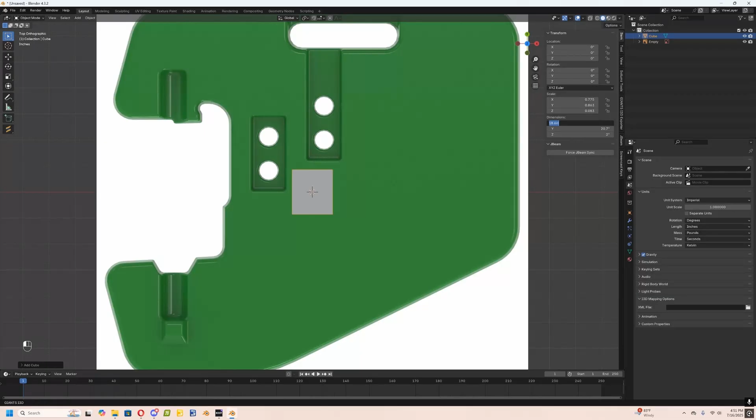So now we have our weight, and it looks like I have these reversed, so I'm just gonna flip these. And then we're just going to go into wireframe, and the reason I chose a reference image before, I should probably mention this, is because whether you're in wireframe mode or not, it'll allow you to see the corners of your mesh while also still displaying this image.

Because if I were to just go Shift A, image, and then mesh plane, and then just choose that image, yeah, it'd show up in material preview here, it'd all be there, but when you go to wireframe, it's just a regular plane with that texture applied. So that's why I like to

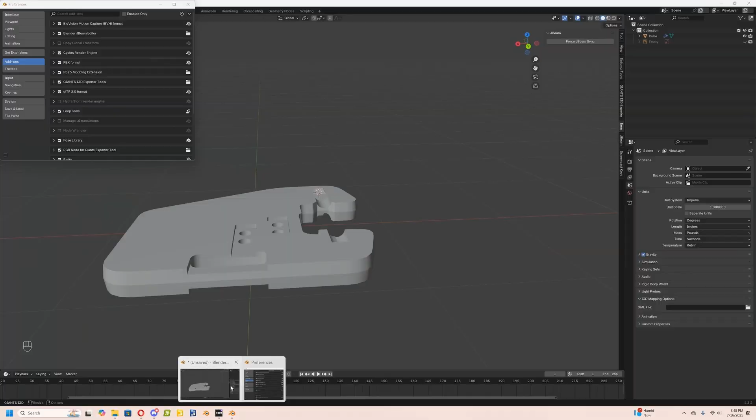Okay, now that we're done with the modeling phase, at least for the most part, I can go ahead and double check the sizes that Deere has provided on the website. So again, the height should be 2 inches, which, well, we got that. Width should be 18.4, and then the length should be 20.7.

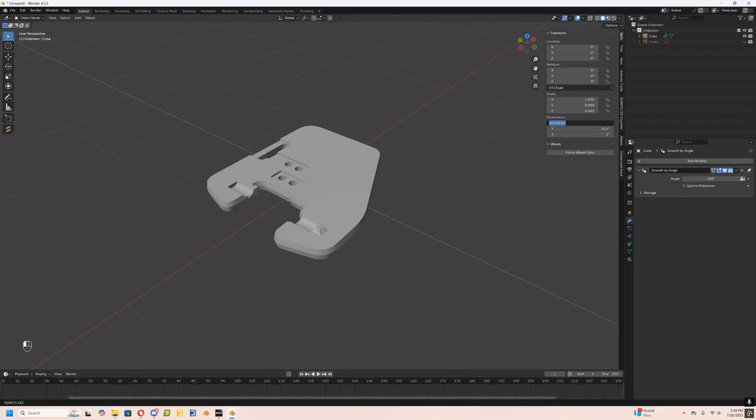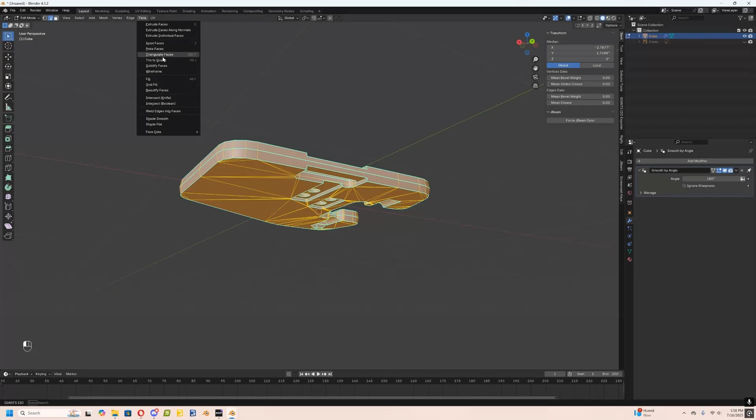Okay, now that we've got our size finalized and we've got all of our edges set to what we want it to be, we can just go tris to quads, just double check that. And so far we're doing okay on poly, maybe a bit high for my liking and definitely for Giants' liking, but you know what, whatever.

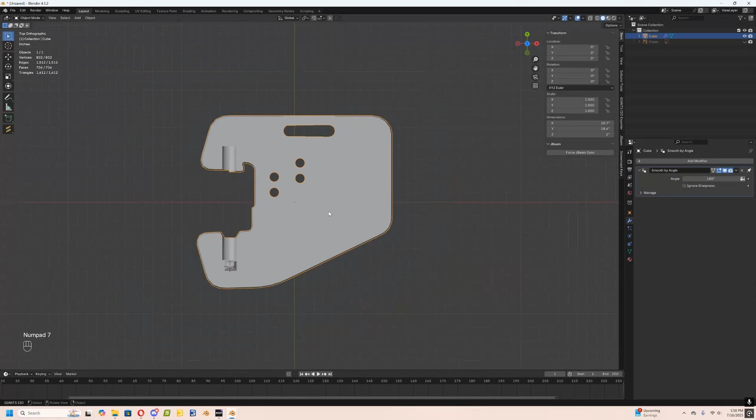Next thing we're gonna do is bake a normal map. If you have all your detail on the model like I do, and you don't have any emblems or anything that isn't 3D on there, what you do is you just duplicate the mesh, go high poly, low poly. But what I'm going to do is make a bevel normal map. So I'll just call this JD weight.

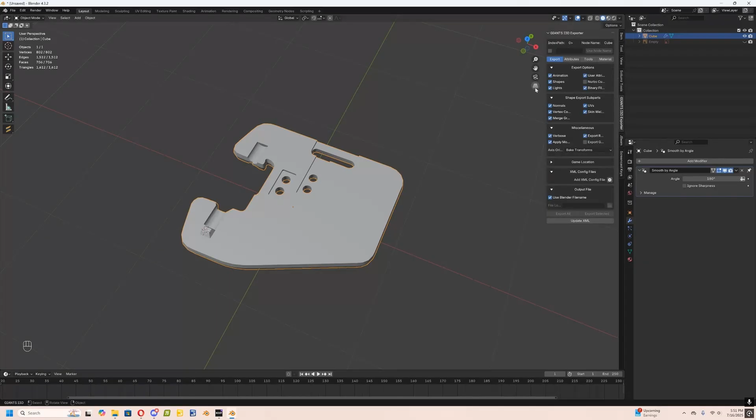Okay, now that we got that, now we can create our normal map. So I just want to go image, new, we're going to call this weight_normal. I'm going to set this to 2048. No alpha, new image. Set this to non-color, and we're going to go Shift A, and we're going to go bevel. So now we're just going to connect that to normal, and we're going to set the radius to 0.005.

With this selected, we can go set this to Cycles. I usually set mine to GPU because I get a faster GPU than my CPU. I think most people do.

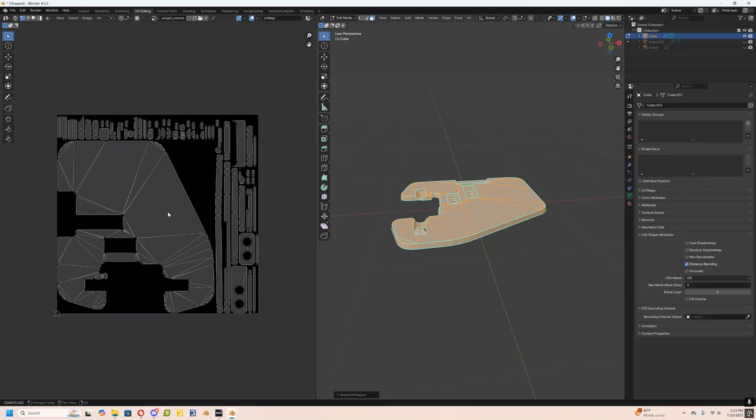Now we can unhide this, join that back. Actually, hold on, before we do, we're just going to link UVs.

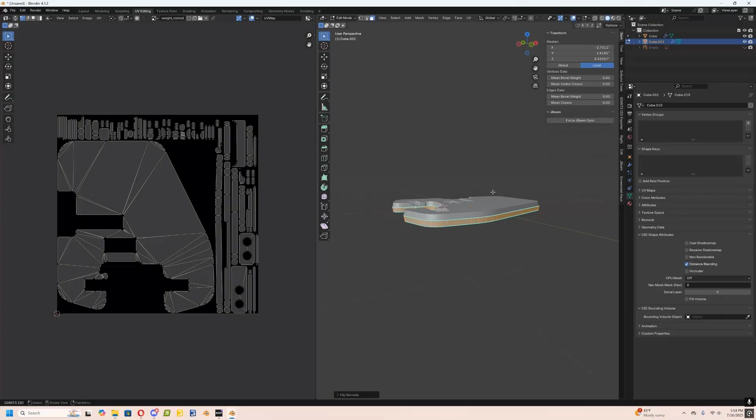That didn't quite work, so we're just going to go Shift D, Object Mirror, Z Global. We go Alt N, flip, because when you apply the rotation and scale on it, it'll flip it inside out for whatever reason. Not sure why, but it does, so I always try and do that.

Now that we've got our UV map made, both sides are going to be the same texture. Get a shading, and then now we can just go ahead and hit bake. Just hold on, now we hit bake.

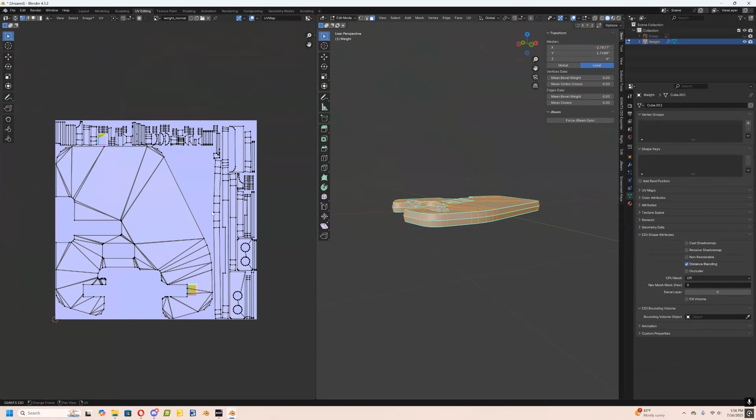Because I'm an idiot and forgot to do it beforehand. And then we're going to go ahead and take a look at what's over here. Nothing, okay, oh that was the other one. Okay, never mind, alright, now we can go ahead and bake again.

And that should have fixed that. So now you've got a nice clean normal map.

So we're going to disconnect this. We're going to go normal map. Going to connect this. And now we get a nice beveled normal map that looks, well, pretty good, honestly. No imperfections, it's all there.

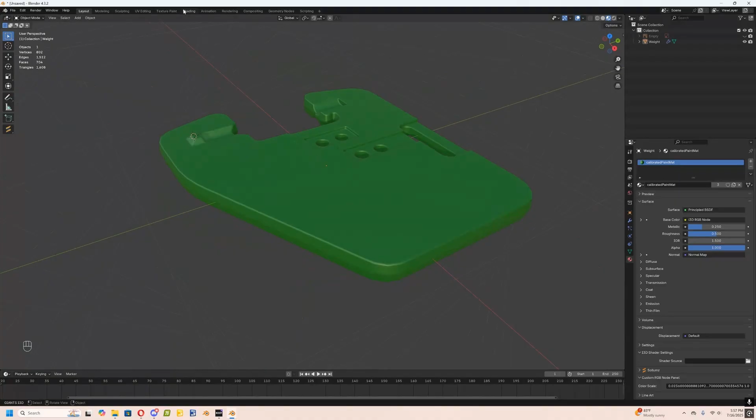So we're going to save this quick.

Next, what we're going to do is we're going to export. This is an FBX. Limit to selected objects if you just want one or the only objects in the scene exported. And then we're going to save this normal map as weight_normal.

And then in Adobe Substance Painter, we can go ahead and fire that up. Once we're in, go File, New. I would recommend getting the Vertex Design FS25 Substance files. They honestly did an amazing job, and I use them for everything. It turns out amazing when you use them.

So next we're going to import baked maps. We're going to find our folder here, weight_normal, get that selected, and then we're going to import our FBX. Hit OK.

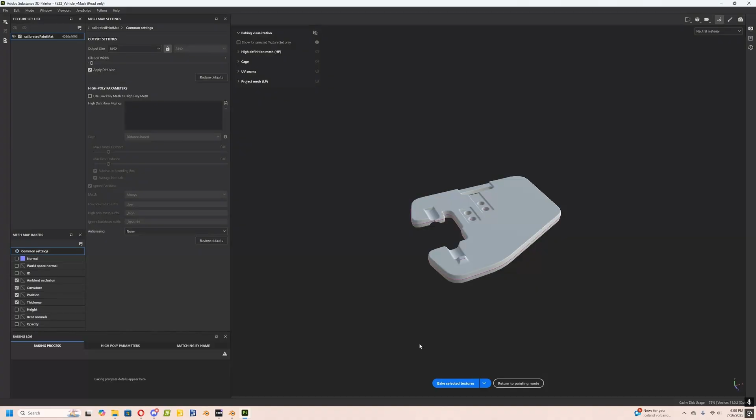Common settings, I like to bake in 8192, because then you can bake in a higher scale, but then when you export the textures, you can export it as 2048, less loss rather than if you bake in 2048 and there's a lot more pixels. So we're just going to go bake.

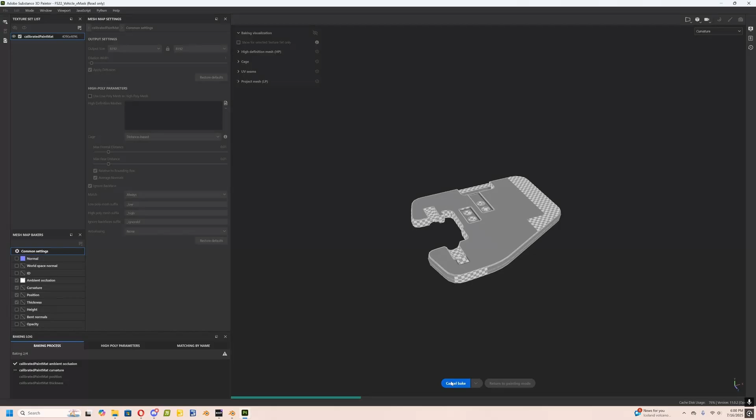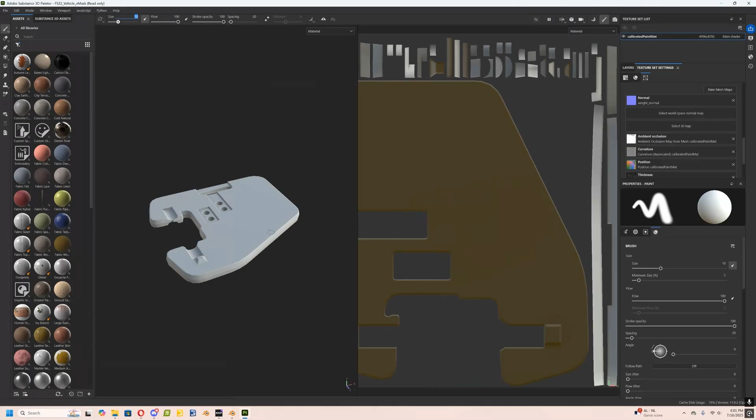Okay, now when we return to painting mode, we're going to have some shadows, maybe some different levels of detail in some models, where the ambient occlusion lights hit. We're going to go Smart Materials, find our Vertex Design Vehicle BaseMat, and apply that.

Underneath Layers, we can go down to our dirt layer. We're going to start with that. Click Dirt, restore defaults. Now all of our dirt's going to start showing up in the darker areas, some of the corners and crevices.

Now if we load this into Giants Editor right now, it's not going to look great. In fact, it's going to look terrible, because that's a lot of dirt, and what shows up in here is a lot different than what shows up in GE.

So what I like to do is set this to 0.35, and set the grunge amount to 0.75, and then we can change the scale of the grunge and make the dirt look a lot more frequent here. I'm going to bump this up to 0.4, and make it look like that. That looks a lot better.

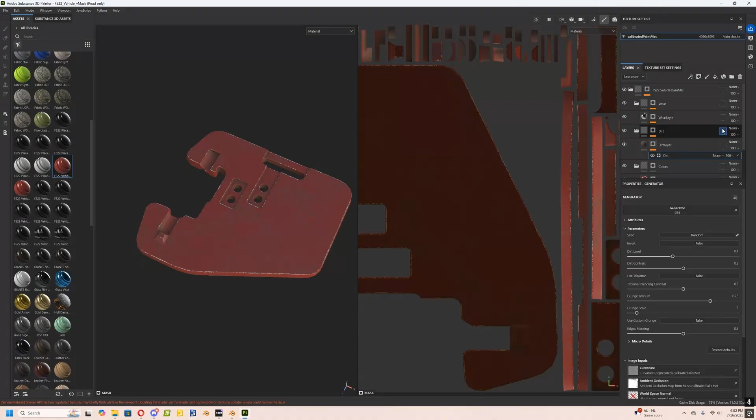And then for our wear layer, just pretty much do the same thing. With that normal map, it's going to generate wear all along the beveled edges that we had here. So I'm just going to turn the wear level down quite a bit, actually to 0.25.

And then we're going to go to grunge amount and increase this a lot. You can increase or decrease the scale however you please. I'm going to decrease it, so it looks something like that.

And that's going to look a lot different in GE as well, so just FYI. Now that we've got that all selected and we got all our materials applied, we're going to...

go File, Export Textures. We're going to change this to our export preset, so our FS22 vehicle VMask. And for size, we're going to go 2048, because remember we baked in 8192, but we want to export as 2048. We're going to change our file here so we export to where we want it.

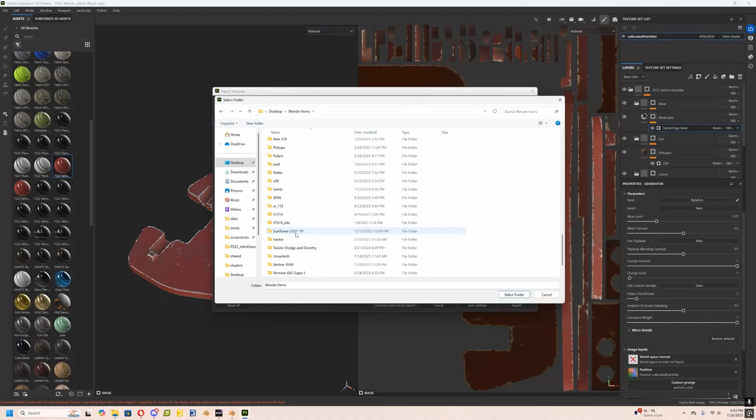Just going to go export.

We have this normal map, and when we have this normal map, it's the same thing. You can delete that one. We want our Blender render, and then we're just going to go open with paint.net.

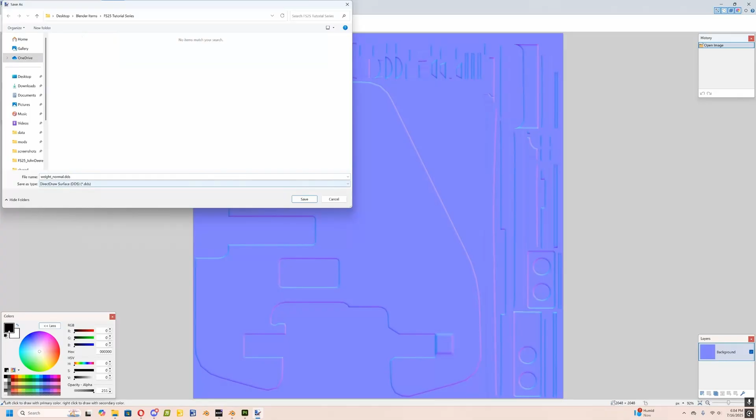We're going to go File, Save As, and we're going to go DDS. In here, we're going to make sure it's set to DXT1. DXT1 is used for normal maps, spec maps, anything that doesn't use alpha. Anything that has an alpha, so like a diffuse texture or decals, that'll be DXT5. And then DXT3 is used for things like brand images. So we're going to go ahead and save that.

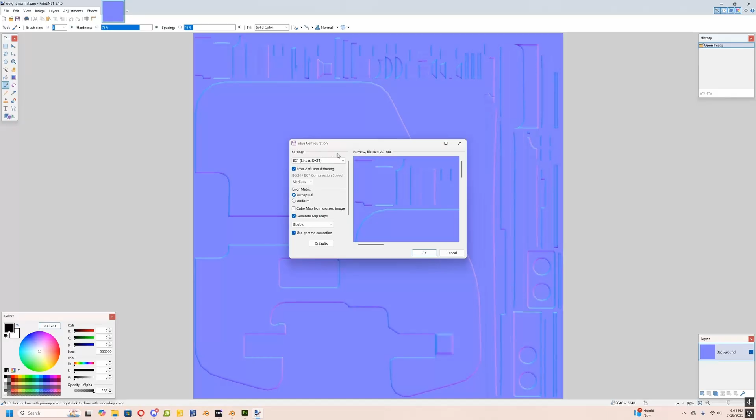We're going to do the same here with the VMask. We're going to go Save As, and we're going to name this weight_VMask.

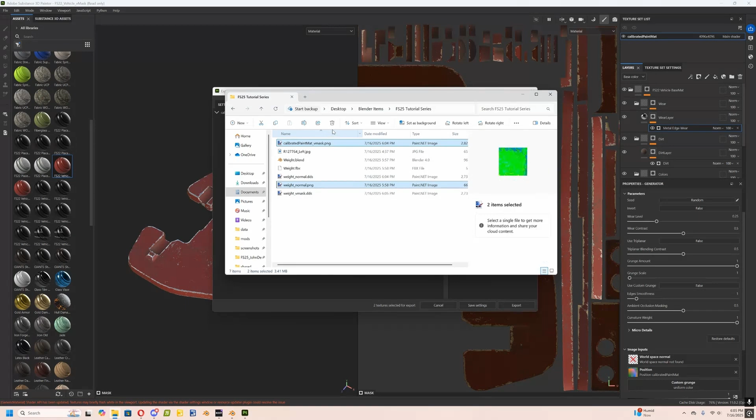Okay, we're going to delete the old PNGs. And then back in Blender, we're going to go to our Giants Editor exporter here. We're going to go Export, change the file path to here, rename this to an i3D, set i3D file, and export selected.

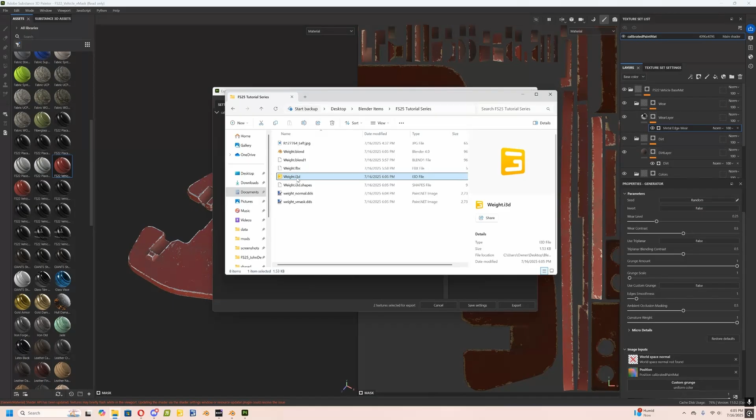Now, in our i3D, before we open it, we're going to right click Visual Studio Code. Something that always applies if you export normally is an emission. It sets the emission to white by default. If you set it to black, it won't apply a default emissive texture when exporting into Giants Editor. But if you do and you just forgot it, I'd just like to go delete that.

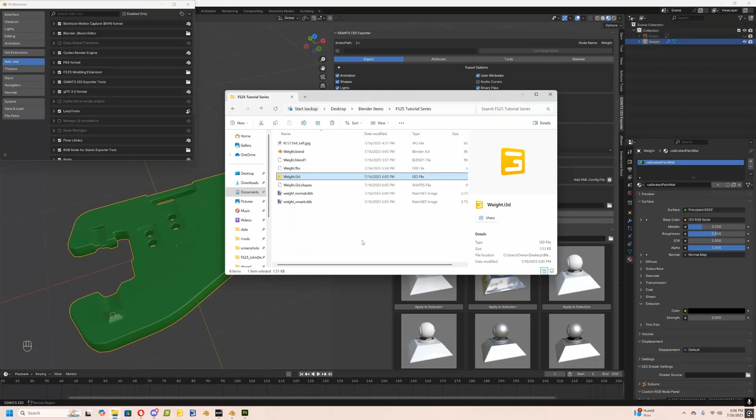Now, if we load it up in GE, it won't be bright white, and it'll have your material that you exported it with.

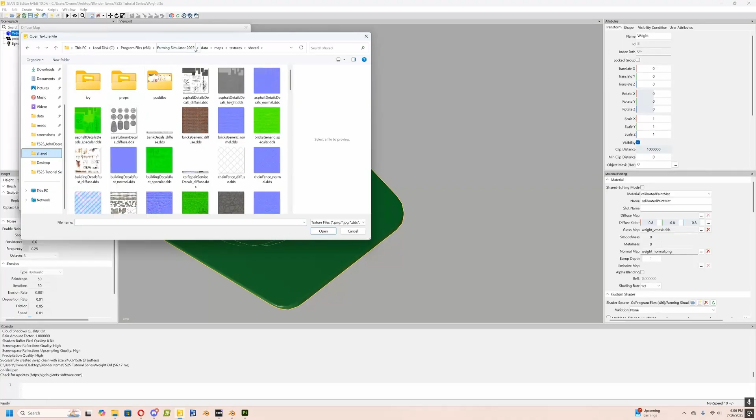Now under here, we can go ahead and apply our weight_normal DDS and our gloss map, and we just use a default white texture provided by Giants. Data shared default white right here, or white diffuse.

And just like that, you have officially fully modeled and given textures to your model. Just double check what the dirt looks like and everything will look like in a game.

We can go to Vehicle Visuals Control, and we can just slowly walk through the dirt and slowly amp up the scratches.

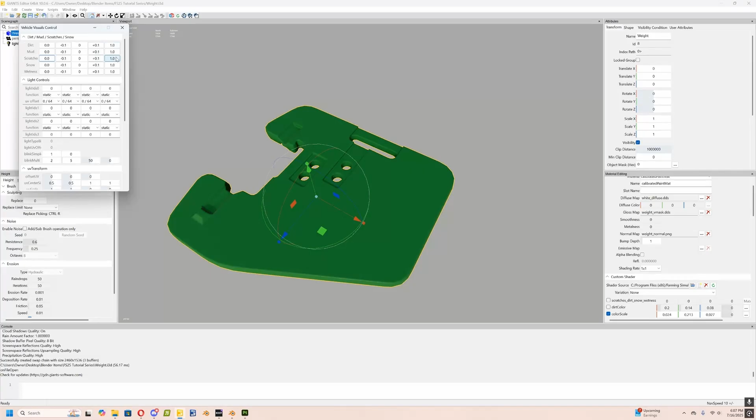So when done, it'll look something like this. Doesn't that look great? Maybe, I don't know, you be the judge. I think it does personally.

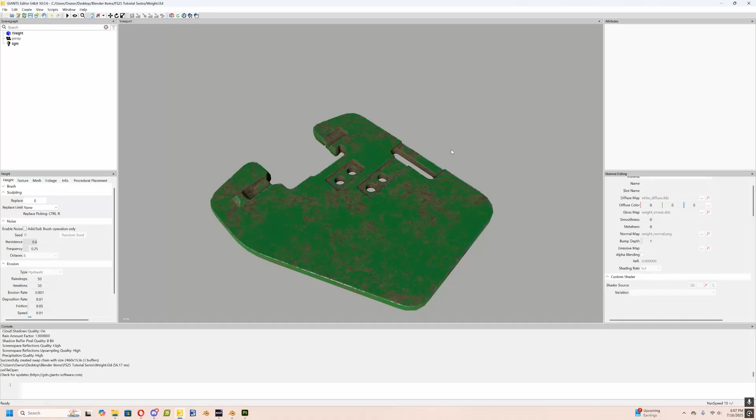But yeah, that's essentially how you go from like a basic cube in Blender to a full-fledged model with normal maps, spec maps, and fully in GE.